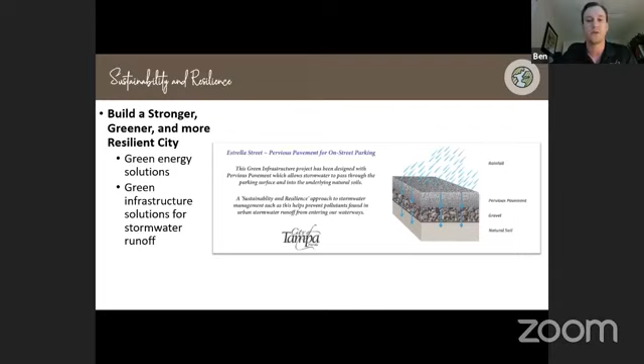So to build more on sustainability and resiliency, the City of Tampa is committed to finding ways to build a stronger, greener, and more resilient city. As our city grows, we want to ensure we're implementing sustainable practices that can be scaled as our population grows in the future. This will allow us to meet the needs of a growing city while supporting critical services essential to daily life.

Part of this commitment involves identifying what we call green infrastructure solutions to more efficiently manage stormwater runoff. That's rainfall that doesn't soak into the ground and runs off on hard surfaces like asphalt and concrete. We're looking at ways to begin incorporating these into a lot of our new stormwater projects.

One example I wanted to show you today is what we call pervious pavement. I have a cross section here that shows how that works. It's basically a new technology - well, not necessarily new, but becoming more popular around our city and the country. You basically take a pervious surface of asphalt or concrete that allows rainfall and water to seep through easily. Then we underlay it with natural soils, gravel, sand, and rock so water can seep into the groundwater instead of running off on the surface and creating more flooding.

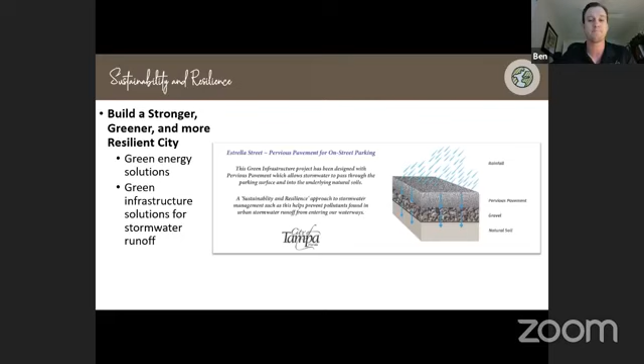I've got another example here of green infrastructure. This is a picture of a stormwater pond in South Tampa. We just installed this a couple years ago and we're really proud of it. There were two lots here that repetitively flooded, so the city acquired those lots, demolished the homes, and turned it into a stormwater pond with native plant species that captures and treats runoff before it enters Tampa Bay.

It's a really cool way to address this, because in areas like South Tampa, we don't have a lot of space for things like retention ponds. So when we can turn areas that used to flood into areas like this with really resilient infrastructure, it's a great thing - it helps flooding and also improves our water quality.

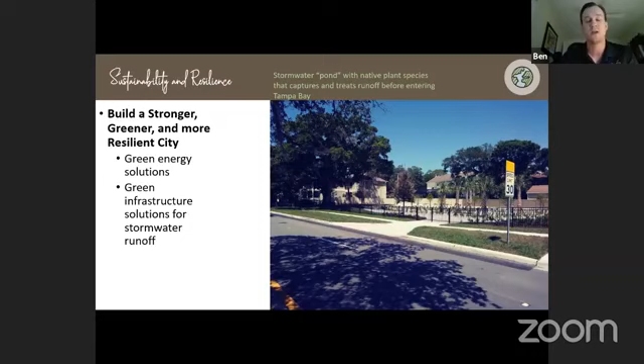Next, I'm going to get into sea level rise a little bit, as it's kind of a new threat we're dealing with. Sea level rise isn't necessarily new, but it's something we're really focusing on now citywide, and especially within the stormwater department.

So sea level rise - we're just now starting to figure out what the impacts are going to be, especially on our stormwater system. Recently, a study pulled data from a coastal tide gauge over in St. Petersburg, and it showed that since 1946, there's been almost 8 inches of sea level rise in the Tampa Bay area, which is pretty incredible. The Tampa Bay Regional Planning Commission did a study showing there can be a rise of anywhere from 2 to 8.5 feet of sea level rise by 2100.

So when you think about that, between 2 and 8.5 feet, that's a big difference. But even if you just think about 2 feet of sea level rising, that's pretty major, and it has a huge impact on our stormwater system.

Any sea level rise is going to impact critical facilities close to the coast, Tampa General Hospital being one of them. The city did a study and saw that 31 local roads are going to be at risk from sea level rise in the coming years. So it's something we need to start thinking about and preparing for, changing how we design stormwater projects going forward.

Ben, if I could jump in here real quick. Yeah, absolutely - I want this to be conversational, as this format has been.

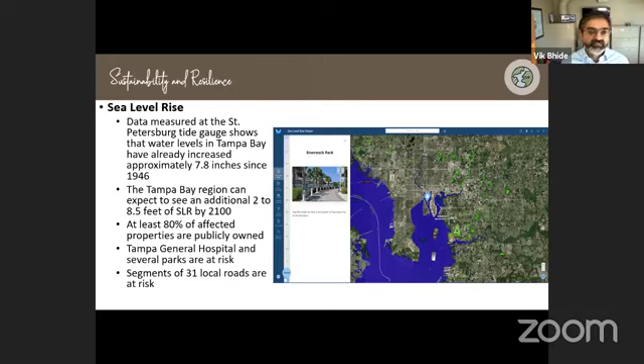I'm planning on addressing the ways we're going to deal with stormwater in the future when we design stormwater projects, and you hit on all of them right there. If our sea levels start rising, all of our coastal outfalls in the city, that's how all the stormwater drains in the city, and if the tide's already high and we have a higher sea from that, it's going to make it really hard for the land to drain. So it's really important to consider these things.

So I'm going to keep rolling along here. The Planning Commission came out with a couple of graphics here. They're sort of like doomsday graphics. You don't want to get too hooked on these, but it gives you a really good representation of what 4 feet of sea level rise and then what 8 feet of sea level rise is going to look like.

There's a little picture here of the Riverwalk in downtown Tampa, and with just 4 feet, that's a lot, but with 4 feet, the Riverwalk is going to be completely underwater. With 8 feet, obviously the same, but even worse. All these areas in light blue around Town and Country, West Shore, Bay Shore, Davis Island, they're all going to be impacted by sea level rise. So it's something we need to start looking at and thinking about.

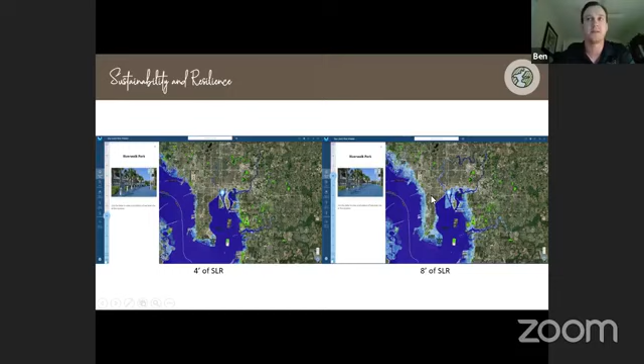I noticed those areas in blue that you just showed. Are those what you call the coastal areas in the city of Tampa? Yes, absolutely. Those are the coastal areas — Town and Country, West Shore, parts of the Hillsborough River are affected by the tide and things like that. Thank you. No problem.

Some of the ways the city has been starting to think about and address sea level rise over the past 10 years or so — we've been doing a bunch of different grants with different government agencies to start examining the ways sea level rise is going to impact our stormwater system. Back in 2011, we did a sustainability action plan with Atkins, an engineering consulting firm. The Hillsborough County Planning Commission, as I stated, we had a partnership with them to study these things. And recently, just finished up a couple months ago, we hired a consultant and got a $75,000 grant from the Florida Department of Environmental Protection to do a vulnerability analysis and resiliency strategy report, using computer models to simulate how high the sea level is going to rise and what kind of impact that's going to have on our existing and future stormwater systems.

We also came up with some ways we might be able to combat sea level rise, such as raising minimum roadway elevations, looking at our seawall ordinances, redoing our codes and regulations, elevating buildings and structures, and implementing more green infrastructure solutions are all things we're thinking about. So the city is actively focused on addressing sea level rise. This mayor and administration have really stressed that, and we think it's really important going forward.

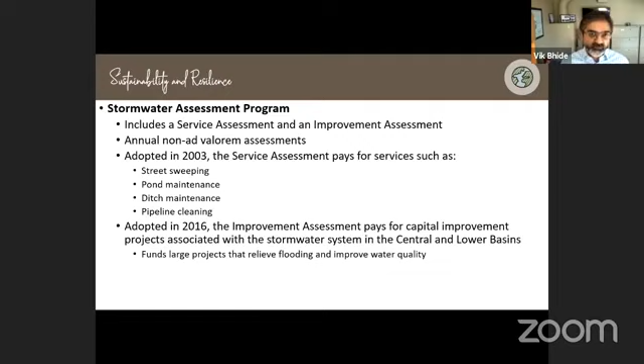So it's really important. A quick point there, Ben — one of the things I feel the Stormwater Division does really well, and where this assessment comes in very handy, especially the improvement assessment, is that for the most part on these large projects, every dollar we fund as Tampa towards this assessment, SwiftMud, or the state entity, the Water Management District, matches those dollars more often than not. We're able to get much more out of this assessment, which is locally funded, by pairing it with state funds and get more done.

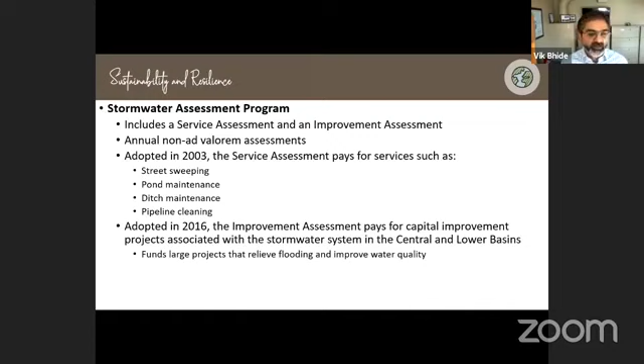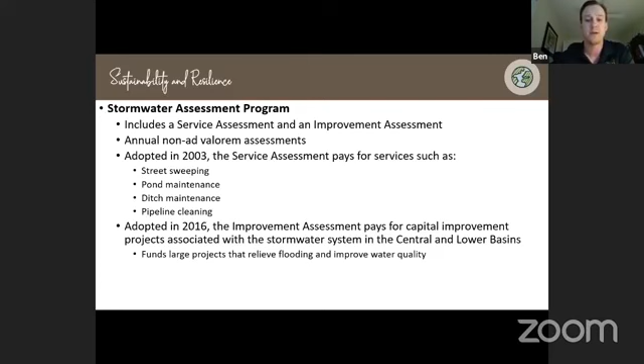Absolutely, yep. We do a lot of our really big projects with the Water Management District, and they help us fund these projects 50-50. So it's a really big deal, and the improvement assessment goes a long way in making that happen.

A small side note to the community: if you see large items tossed in ditches or ponds, call the number at the end of the presentation. Because what's going to happen is, if you live in that area, at some point that large item—we've had hubcaps, chairs, sofas, you name it—are going to get stuck within the stormwater system. That's going to create unintended consequences and flooding. We typically see that early on in the season, but it's something to be mindful of. If you see something in a ditch, let us know. All of the ditches, we try to get them maintained and cleaned on a 30-day cycle.

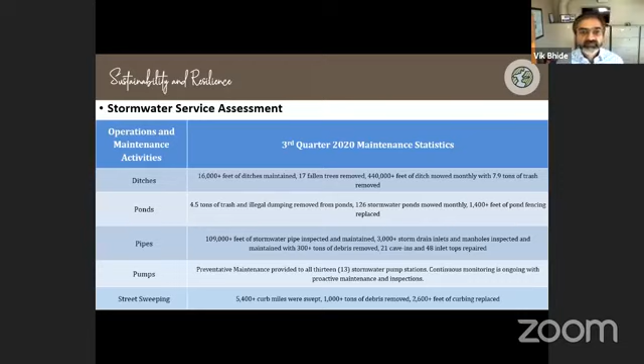Thanks, Vik. I wanted to go through a few before and after pictures that our maintenance crews do, just to show what we're talking about here. This is a ditch in the city. You wouldn't think of it as a massive means of conveying a ton of stormwater, but in the before picture you can see it hasn't been properly maintained, it's all choked off. Our team comes in and cleans it out, straightens it out, seeds the banks, and this can really help improve water quality and flood protection.

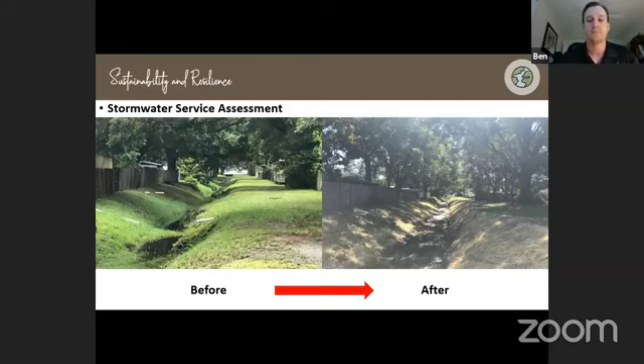I'm just going to roll through some more here—it really shows how amazing it is. In this one, you wouldn't even notice there was a channel or a ditch here. We cleaned out all the cattails, and got some more here.

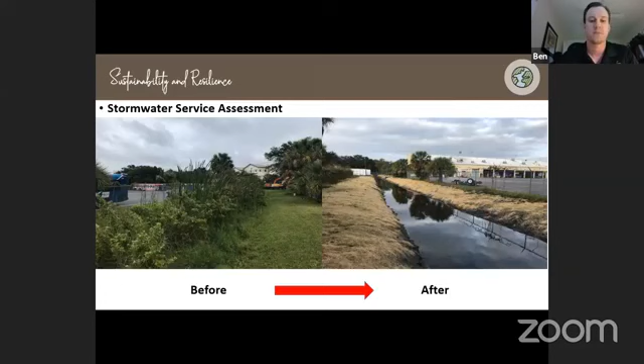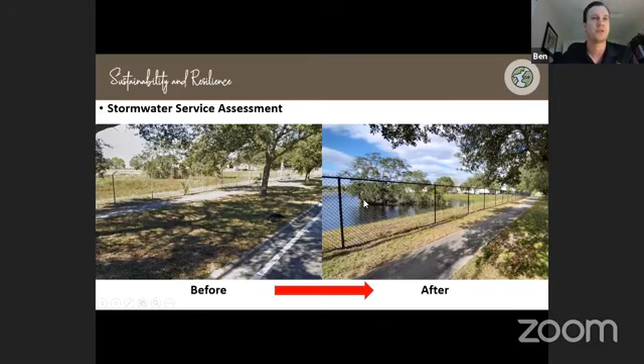Here's an old dilapidated fence that was coming down. We replaced it with a new, really nice one. You can see in the background the pond was all choked off by vegetation, so we went in there and cleaned it out. I just find these pictures really satisfying.

Here's one more. There was a ditch that was all overgrown and needed to be cleaned out. We added some rocks here to stabilize the bank and provide some erosion protection.

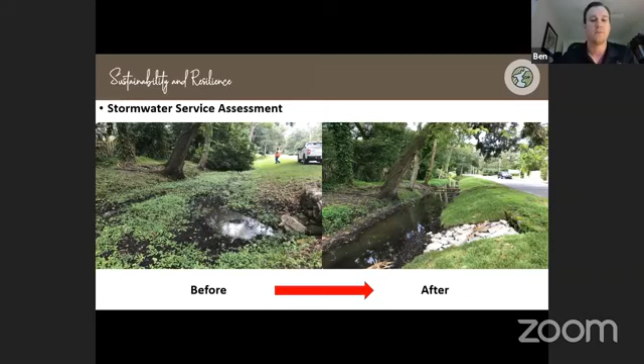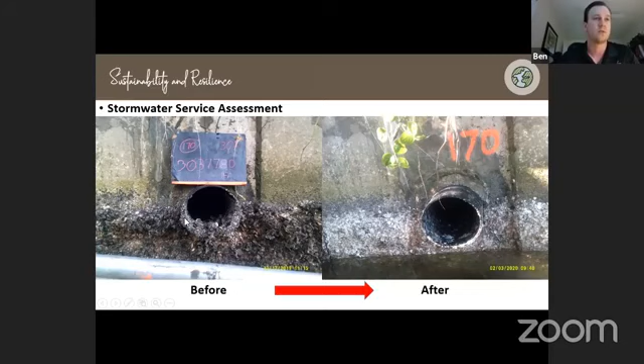Here's a couple pictures from stormwater outfalls, in the coastal areas we were referring to earlier, where sea level rise is going to play a big deal. We keep them cleaned out—you can see all these barnacles that get jammed up in there, which can really affect the way stormwater flows in and out.

Here's just one more—it's crazy. You wouldn't even think these things were there, but our team goes in there and cleans it out. So it's pretty cool.

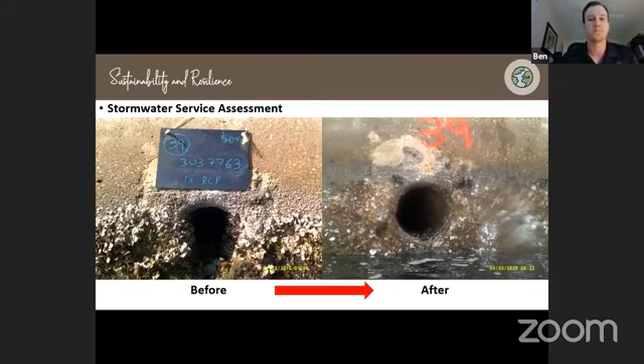I'm going to switch gears real quick to the stormwater improvement assessment and give you a rundown of what's going on with that. As I said earlier, the improvement assessment funds large capital improvement projects in the central and lower basins—basically everything south of Fletcher Avenue.

Right now we have five major CIPs in progress. The first one, working our way north to south, is what we call the North Tampa Closed Basin Flood Relief Project. This is an area that historically has really bad drainage problems. We call it a closed basin because the only way stormwater can leave this area is really through a sinkhole.

So it really complicates the drainage problems in this area, but we're trying to strategically acquire properties and turn them into retention ponds to alleviate some of the flooding. This is ongoing, we're doing this right now.

The next one going south is the Southeast Seminole Heights Flood Relief Project. This is a really big project that we're in the design phase of right now. We're also working with the Florida Department of Transportation on this one, FDOT, because it encompasses some parts of I-275. But there's a lot of really bad chronic flooding issues in the Southeast Seminole Heights neighborhood.

Working our way further south, there's the Cypress Street Outfall project. That's another really big one that we have going on right now. It's actually under construction. They're in the area of Cass Street and Rome Avenue right now, over by the University of Tampa, south of 275 by Kennedy Boulevard. We have a lot of longstanding flooding issues right there, so we're putting in really large pipes to alleviate some of that flooding.

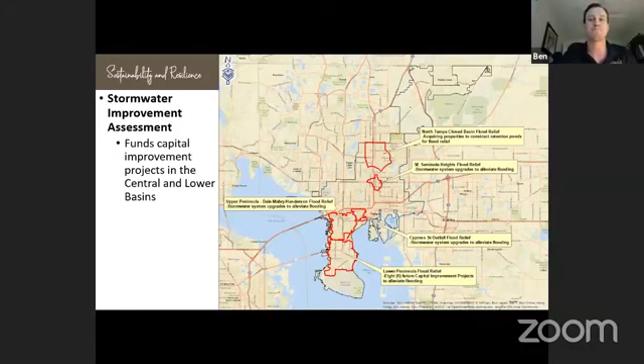Next, I'm going to talk a little bit about the FEMA coastal floodplain maps that are getting updated for Hillsborough County right now. This is a really big deal that I hope everybody that lives along the coast in our county is aware of. This is actually a process that's led by Hillsborough County and FEMA, but it obviously affects the city of Tampa, so everybody needs to know about it.

Basically, the coastal floodplain maps for the county right now are really old and outdated. The data they used to make these maps was from back in the 70s and 80s, so it's really out of date. We have really new technology that FEMA and the county are using to update those maps, and those new floodplain maps will become effective in either the spring or summer of 2021.

The county is advising people with homes built before June of 1980 to buy or renew flood insurance before the spring or summer of 2021. If you guys want any more information on these new floodplain maps, you can call the city's construction services division at 274-3100. Also, if you just do a quick internet search for Hillsborough County FEMA floodplain maps, it'll be the first hit right away. I was going to put the URL on here, but it's really long. If you just do a quick search, it'll come up.

So it's kind of telling that the county is already requesting the community to purchase flood insurance prior to spring of 2021. Can you interpret that a little bit more?

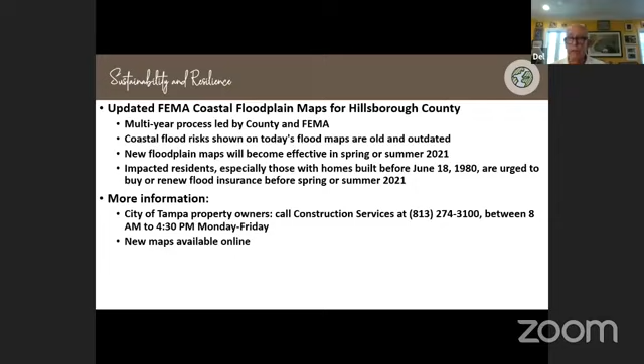There was a series of public hearings where you could go to the libraries and see the flood maps. Are these the flood maps you're talking about? That is correct. I've got another slide right here that shows the changes that are coming.

That was a public hearing held by the county and FEMA. They wanted to give people an update on what's going on, and they reached out to every single parcel affected by these new changes.

On the left, the areas in yellow and blue are what we deem the high risk flood zone, zones AE or VE. Basically, if you have a federally backed mortgage on your home, you're required to buy flood insurance through the National Flood Insurance Program or a private provider. On the right is the new coastal floodplain map.

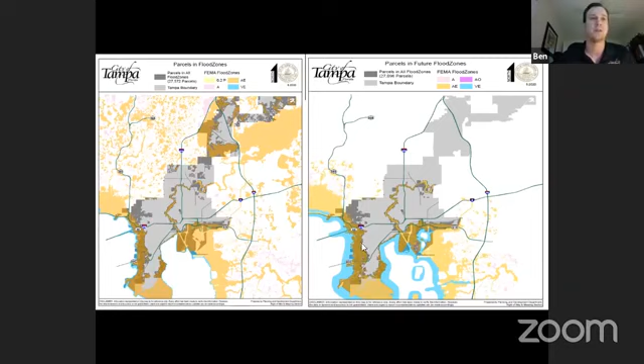Especially on Davis Island and the West Shore, the floodplain extends a lot further east, so a lot of people are going to be affected by these new floodplain maps. But it's good and bad, because although you might need to buy flood insurance or pay more, that might not be a bad thing, since it reflects a more accurate risk for future flooding, especially for coastal and storm surge events.

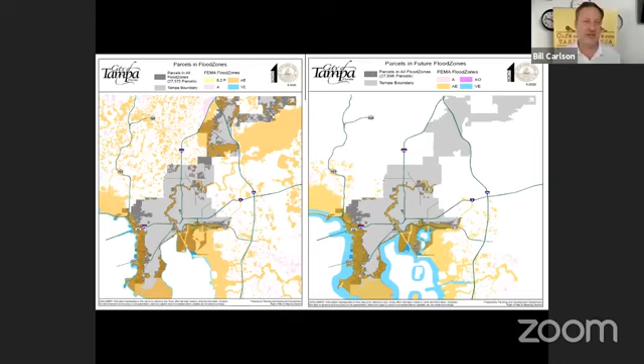I'll go through these really quick. Last one I want to touch on is general flooding in the city of Tampa. Tampa's a really tough place to manage stormwater. We have a really old and undersized system that we're constantly replacing, but the city is really flat, which makes it hard to drain the land. There's also coastal and tidal effects, like we showed earlier with sea level rise, and it's going to be really tough to manage that going forward, but we're committed to it.

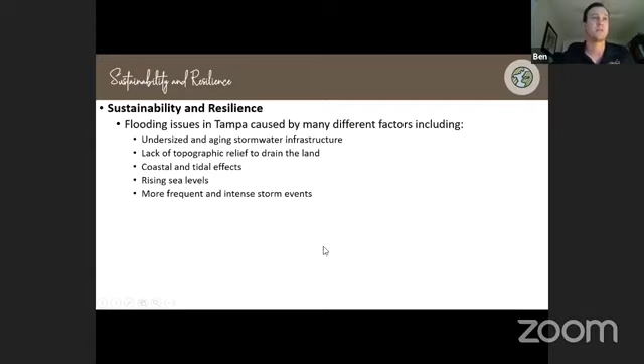We've also seen more frequent and intense storm events. We're not sure if that's related to climate change or other things, but it's happening. We've already had a really tough rainy season, so I just wanted to share these things. Managing stormwater in the city of Tampa is really difficult.

Just so everybody knows, if there's flooding in your street, your kids are swimming like in a pool down the street or something, call this number right away and you all will come address that. Let me ask a question real fast.

As new homes come in, they're building higher. Maybe you could quickly explain that. And then people who are in the area that have homes that have been there a long time are worried because they're not raised to a higher elevation. They're worried about water from the new home rolling into their yard. Can you explain what the rules are around that?

Absolutely. So it's a city code that you can't adversely impact your neighbor with new construction. We have people and engineers that review plans for new developments and new homes to ensure that they're not going to push floodwaters onto the adjacent property. That's a really big deal for us, and we make sure that's adhered to all the time in new development.

As it relates to general construction going higher, if a property is building a new structure in the high risk floodplain for FEMA, you're required to build 1 foot above FEMA's base flood elevation. Your finished floor elevation has to be 1 foot higher than the base flood elevation for insurance purposes, and obviously the risk. So there is a general trend of building higher, but we do it so you don't adversely impact your neighbor.